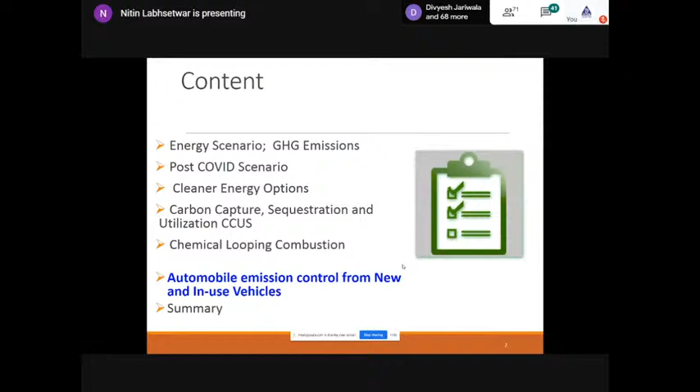So this is how I planned it, and I'm going to show a lot of slides, and of course I'm going to give you a lot of stress, because I have also seen that after my talk there will be a talk on stress management. So please don't worry. And as I mentioned, please enjoy this lecture and feel completely free to discuss.

Just 2 to 3 slides about my institute, what NEERI is all about.

NEERI is a CSIR lab. Most of you must be aware about CSIR, the largest scientific body in the country and one of the largest in the world. We have 38 labs, and NEERI deals with almost all aspects of environmental science and technology. We have dedicated departments like water technology and wastewater technology, and considering that energy has a lot of impact on environment, we have a dedicated division which I look after, the Energy and Resource Management Division. In addition to about 120 scientists, we have a very strong presence of students, who are actually our workforce and our strength.

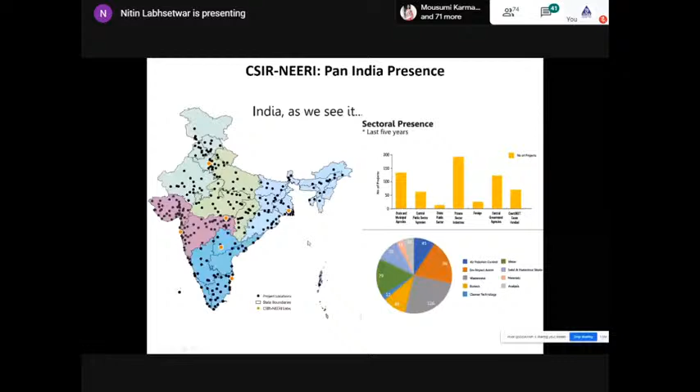We have done projects pan-India, taking advantage of 5 zonal labs of NEERI as well as other CSIR centers and labs. This is the group of the division I look after, called Energy and Resource Management Division, where I personally work actively on diesel emission control and after-exhaust treatment technology. I'm going to share some slides on this.

We are also working on another cleaner energy process, which is a competitive technology to carbon capture, and I'm going to introduce this interesting work, because there is a lot of interest from the engineering community, especially chemical engineers and mechanical engineers.

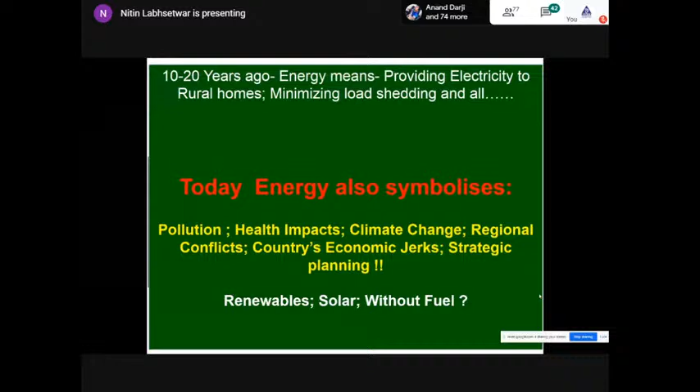And the renewables, the solar - 15 years ago any kid would tell you, for energy you need a fuel. Today if I ask, what is the fuel for, say, windmill? What is the fuel for solar? What is the fuel for maybe geothermal? Then it's becoming more complicated. So it's evolving - that's the good part. It's evolving and there have been fantastic innovations in this.

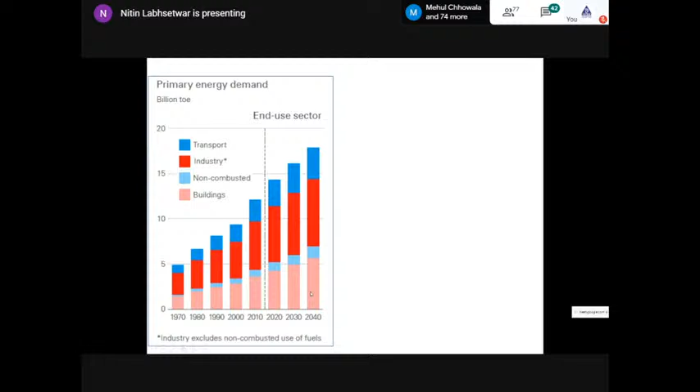Now if you see the primary energy demand, and if you ask a kid and show him this is the solar program for India and we are going with this. What is the distribution of energy demand sector-wise? One interesting thing is buildings will use a lot of energy. What do we mean by buildings? The space where we live, and air conditioning is going to capture a lot of energy. They are going to require a lot of energy in a country like India for air conditioning, and for the cold season, for heating. Then industry is a sign of growth, so industrial demand will also increase. This is an important slide for you.

With the growth of solar so impressive in India and elsewhere in the world, and renewables like bioenergy and other things coming, I think you have a very interesting talk on solar thermal. We can expect in another 10 years, if not in 10 years, 20 years, the scene will be completely changed and we'll have a very fantastic renewable option.

As per this report from BP Energy Outlook, if you see the scene at 2040, you can still see these three slots of fossil fuel providing 75% of energy, if not more. What does it mean? Why are we investing so much in renewables when we have to use this big 70, 75, 80%, unless there's some big innovation coming in the next 10 years? The only reason is you can understand from your left side graph. Despite the very impressive growth in renewables, your total energy demand or requirement is increasing so much that you will have no choice as of today but to also use fossil fuel.

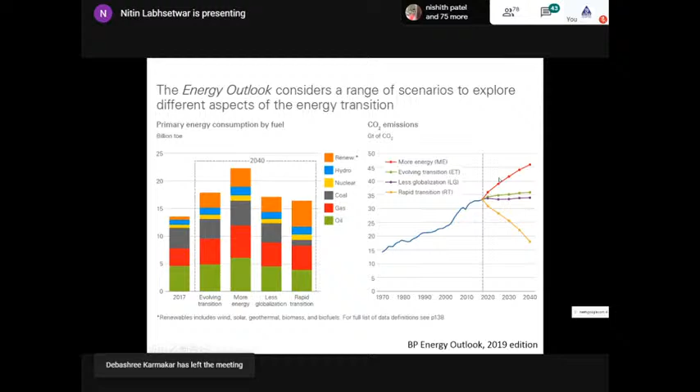This is the energy demand growth. I'm not going to spend much time because everybody knows that India, China, Korea, and a couple of Southeast Asian countries are making impressive growth. CO2 is going to shoot up because of more consumption of fossil fuel, which is primarily due to more energy requirement. We need to do something to flatten this curve of CO2 concentration.

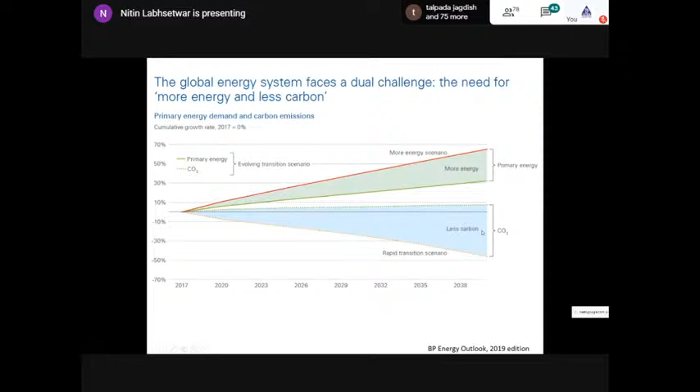In China, coal usage was down and renewables were up. But please mind, this is a percent contribution. So obviously, if overall energy demand is less, we should first manage it with renewables or solar, and if not required, why use coal? Why use oil? Every country did this.

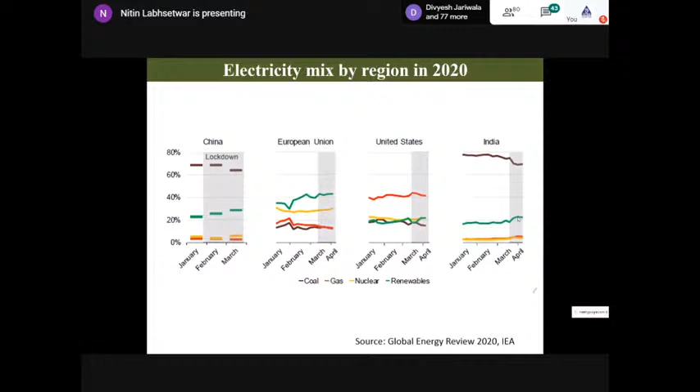Like in India also, coal was down and percent of solar used increased. We can't change the production of solar overnight, so percent contribution of solar was high.

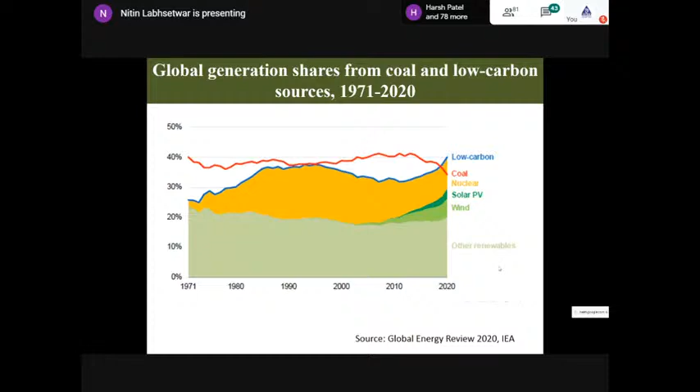This is global generation, how it was affected. Obviously the trend was the same: coal was down, solar was up during this period. This is the growth from 2018 to 2020 for solar PV. Progress was fantastic in 2018, but again it's a percent share. So we are still making very good progress in fact.

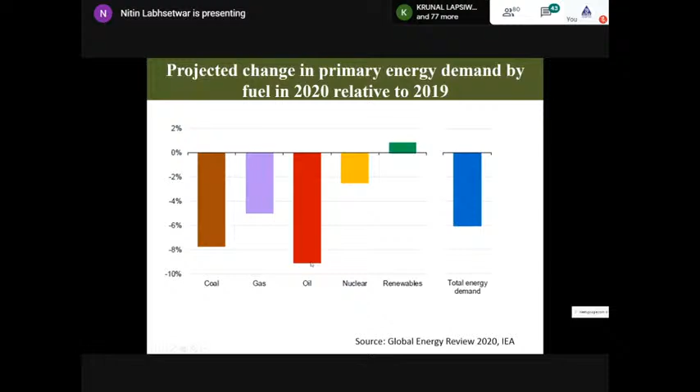Right now you can see oil demand was down close to 9%, and total energy demand was reduced by more than 6% because of the industrial slowdown.

As for CO2 emissions, sometimes there are debates. Some people say not all CO2 emissions come from anthropogenic sources, from energy or transport. That's true, there are a lot of natural sources, but you need to believe that the majority of the CO2 problem, as global warming, is because of anthropogenic sources. This COVID or Corona pandemic was a wonderful validation of those things.

These emissions, once the lockdown was relaxed, started increasing again. So this is a very good validation that anthropogenic sources also contribute, which I strongly believe. Of course, there are hundreds of ways to validate this data, but this was one validation.

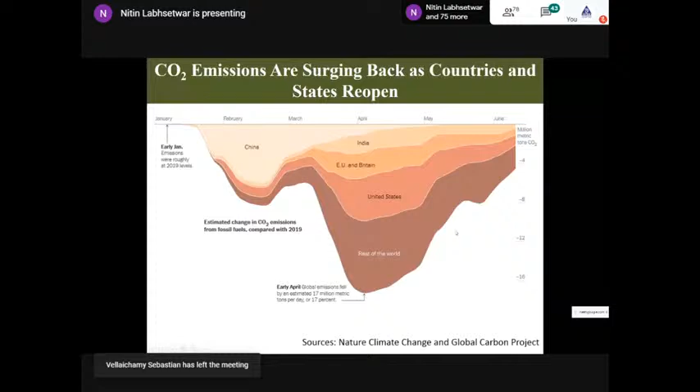So CO2 emissions are now back to normal. We haven't seen any concentration change in CO2 because it takes years. There's a paper showing carbon emissions came down by 8% due to lockdown, but all these are very temporary phenomena. Nature, one of the most reputed science magazines, also confirmed there was a temporary reduction in daily global CO2 emissions, not in concentration, because concentration is cumulative over years and decades.

So this was the background. Now I'll take you to some of the things related to cleaner energy, what we are also doing.

Mostly at NEERI, although we are working on hydrogen generation through photocatalytic water splitting, there is a group with the materials division, I was also part of that group. There are people working on hydrogen storage, and people working on waste to energy. Otherwise, most of the things we are doing is like the post-treatment of anything, or after-exhaust treatment. So my focus will be mostly on that.

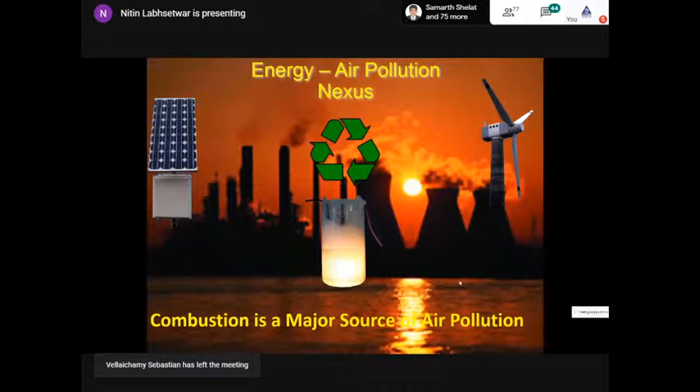This slide I'm repeating for a simple reason: we know CO2 emissions are primarily from fossil fuel or energy sources based on fossil fuel. There are two ways to address that. One is to stop or minimize the use of fossil fuel. Second, as of today, the projection says we are going to increase our fossil fuel consumption. While we should ideally reduce it, we are going to increase it. So what are the options? One option is ruled out, that we replace fossil fuel totally with renewables or sustainable, green sources. We are going to increase production of renewables, but we are not able to replace fossil fuel because of the very high demand in the future.

Second option is making energy technology cleaner or sustainable. How to do that? For example, in India we have a lot of coal, and at the end of the day it will matter about two things: techno-economic viability. In techno-economic viability, the economic part is also very important. You need to understand that what is commercially and economically viable will be a priority. Coal is plenty in India, but unfortunately coal is not so clean. So one of the best options for us will be clean coal technology, and then of course nuclear, hydro, and other renewables will be there.

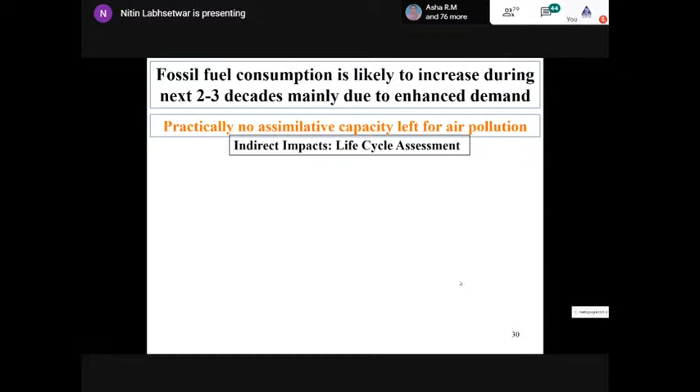Second thing, we need to also understand the indirect impact through life cycle assessment. I'm a strong believer that for practically every resource, every product, every energy option, we should do the LCA, the life cycle assessment.

Now, when it comes to environmental pollution related to energy or fuels, there are two fundamental issues. One is the global issue of CO2 emission, which has a global impact in terms of global warming and climate change. Second is a more localized issue, although these also have a global impact, like water pollution, soil pollution, and air pollution in terms of conventional pollutants like NOx and sulfur dioxide.

Let's quickly see the CO2 or GHG emissions. As I was mentioning, there is no assimilative capacity left. All of you are quite aware, right from the Kyoto Protocol to the Paris Accord, and there's something like a 2-degree change. If the change in climate or global warming is more than 2 degrees Celsius, it can have a catastrophic impact, impacting almost all sectors. We need to understand that.

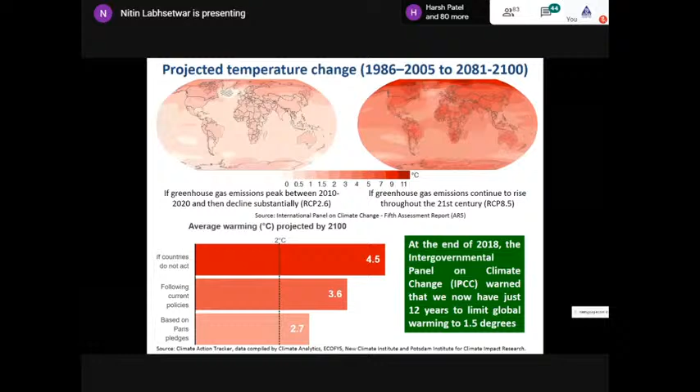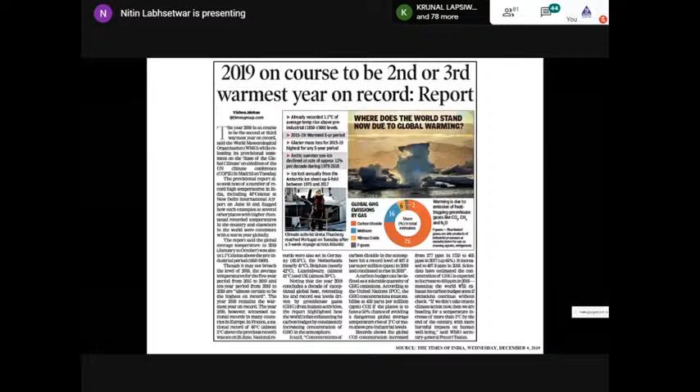There are hundreds and thousands of evidences we all see and read every day, so we are not going to go into the details. Some other opportunity I'll explain if you are interested. So half a degree means heat wave duration, rainstorm intensity, sea level rise, and biodiversity losses. We need to control it. There are evidences - I think this was clear that even 2019 was the second or third warmest year on record. So there are scientific evidences to believe this.

Now, just 4 or 5 slides I have specially introduced, which are not for you, but probably you can use them to convince your students and encourage them to understand what is direct emission and what is indirect emission. Direct emission, we all understand - we are burning coal to generate electricity which comes to our home, which we use for air conditioning, for electricity, and for everything. What are the indirect emissions for that matter?

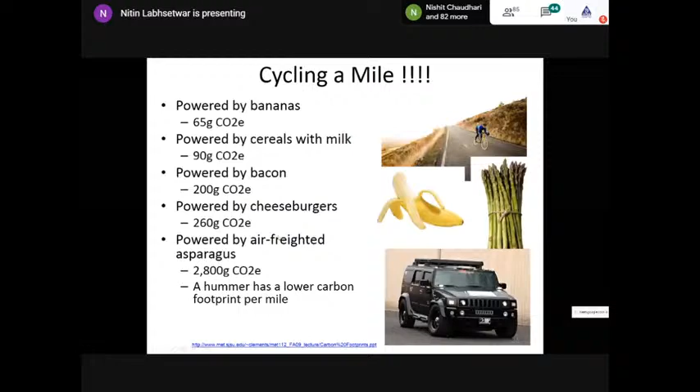This is the way we should understand the indirect emissions of carbon footprint. Carbon footprint is a very important thing. You need to sensitize your students that there is a direct emission. We understand power generation, even those from chemical engineering, chemistry, or mechanical engineering backgrounds, understand the efficiency of our power plant. So we can easily calculate how much megawatts of energy we consumed or generated, and how much coal we used. Coal is C plus O2, so we can calculate CO2.

That's very easy, but what is important is indirect emission. We all need to understand the transmission losses, the energy spent in mining of coal, transportation of coal from the mine to the power plant, the energy required while producing these machines we use in the power plant, and then the transmission lines.

So built emissions, or built footprint, is a very important concept. I often ask students what is the carbon footprint of solar energy, and they obviously respond zero. It cannot be zero because you have already invested a lot of energy to produce the solar panel, it's a high temperature process. So overall we should see what is the carbon footprint of any energy option, and for that matter any process or product. It is very important to sensitize and work out the carbon footprint.

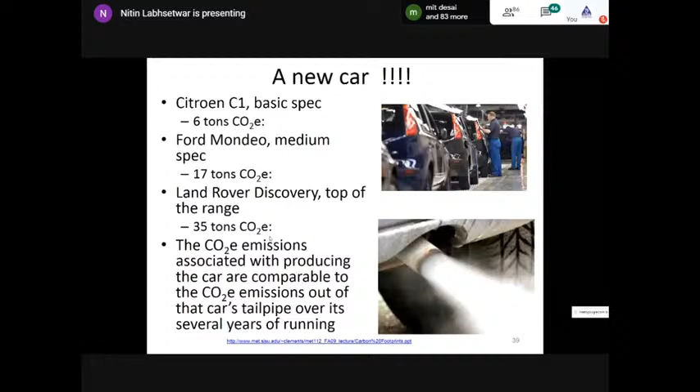From there, he uses a smaller vehicle to bring it to my apartment, where he uses my elevator or lift. So this is the indirect footprint, which is huge, and which is very much available.

Just one last example of the big advantage of this online platform: it is typically estimated that 3 tons of CO2 per scientist is emitted if you are using international conferences and flying with aircraft and using other things. These calculations you will find on the internet, very interesting. Of course, it is important to meet once in a while, but we should always think about the high footprint of traveling by aircraft and all these things, it's a very high footprint for each and everything.

So we need to look into the carbon footprint of all resources we consume, all energy options. We also need to look into the carbon footprint of final energy delivery, of final application under the actual condition of its use. What is LCA? From cradle to grave, we need to calculate everything: what is the carbon footprint, what is the material footprint, what is the energy footprint. Only then can we compare it.

Now, I will strongly suggest, many of you might be experts in LCA, but this is one thing we should promote. We should train our students, and we should also take them along.

Okay, because this is also very contextual. So don't look into any other option in isolation. It's time to subject practically everything to the life cycle assessment, even environmental processes.

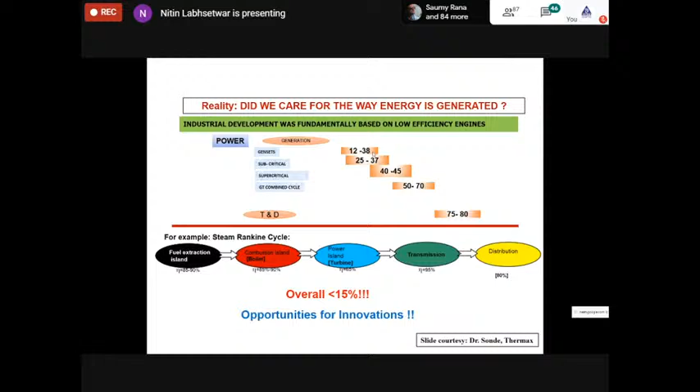There are opportunities for innovation, we should take it positively. As a mechanical engineer, if you make a difference, we all understand the theoretical limitations, the thermodynamic limitations, but we are not talking about a 30% improvement in combustion efficiency. Even if you make a 3 to 4 or 5% difference, it's very, very significant.

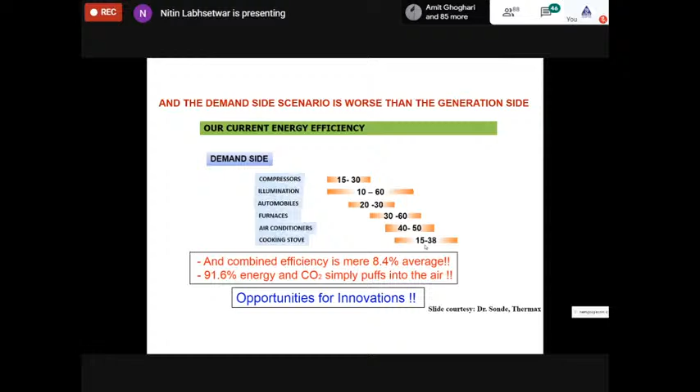Fortunately, the Bureau of Energy Efficiency in the Government of India has a very impressive, aggressive plan. Among my group at CSIR, we are working quite actively in this. There is a subgroup we call the Energy Efficiency and Management Group, and at least 7-8 CSIR labs together are taking up this program in a big way. In the next 5 years, we want a prominent presence in the area of energy audit, including industrial energy audit. So this is what I wanted to tell you.

These are all good options to clean your economy basically. Today your GDP is this much, say 10 units, but your CO2 emissions are high. We know your GDP is going to increase to 50, so your CO2 emission will also jump by 5 times. You should control it - this is a good strategy. But tell me one thing: if you are increasing your population, and increasing your GDP, you are bound to increase CO2 emissions. So these are quite debatable issues. There are things like carbon intensity - you may be able to reduce your carbon intensity, but if you're increasing your demand, population, resources and everything, in absolute terms you are going to increase more CO2.

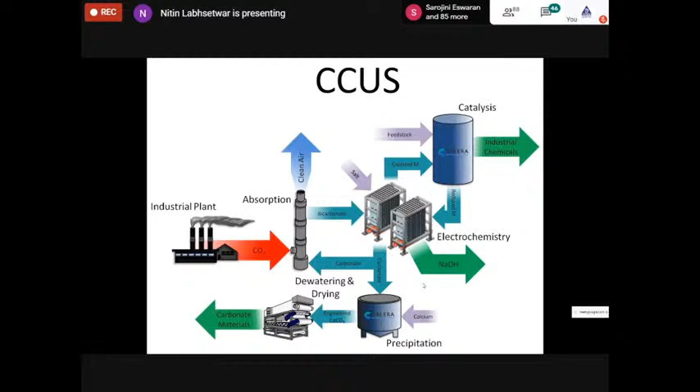So you need to pre-concentrate it. You need to capture this CO2 from 12% to say 95% - that is called carbon capture. Then U stands for utilization - you can convert this CO2 to some useful product. And sequestration is, I'll explain you about the geological sequestration.

So here comes another possibility. From the power plant, you release the CO2, we capture it, and using processes like electrolysis we convert it into carbon nanotubes - there's a big market for carbon nanotubes. But I don't think there is such a huge market today that can take care of millions of tons of CO2. So you need multiple options to convert it into multiple products.

Now come to the sequestration part. There is a good possibility that you can capture the CO2 and sequester or store it geologically, inside porous rocks. There are empty spaces from where we extract oil, and there we can probably store the CO2. So it can be pumped to extract the oil, and we can replace the oil with the CO2. So this will be trapped there.

There are some environmental consequences of this. So first we need to capture it, pre-concentrate it, and then use it. Now, if you don't want to use it and you want geological sequestration, then why do you want to pre-concentrate it? You may not - but the reason is you need to pre-concentrate it.

If you are producing at place X and you want a geological sequestration site at place Y, and the distance is 1,000 kilometers or 500 or 100 kilometers, then you need to transport CO2 from the power plant to this geosequestration site. Transportation means consumption of fuel, and consumption of fuel means you are also releasing CO2. So you might end up releasing more CO2 than you're sequestering. It is better to capture, pre-concentrate it, and then transport it, instead of transporting nitrogen along with it.

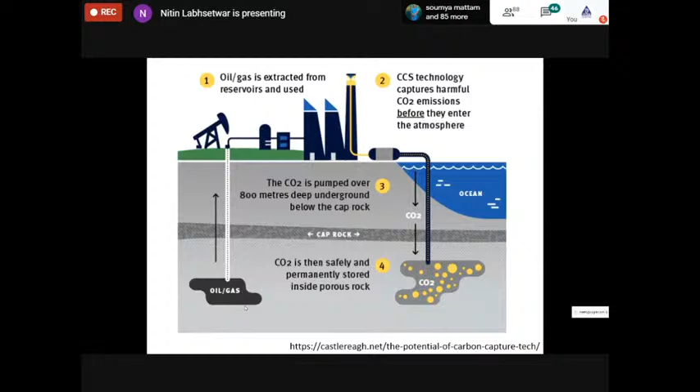So all these things become feasible when there is less energy penalty, less cost involved, and most importantly, by doing anything like this, you should not release more CO2. You should be very, very careful on that.

Now, this is a conceptual thing - you release CO2 by combustion process, by using fuel for generating energy. So the best will be if we can transform this CO2 back into fuel, say methanol or ethanol, or for gasoline in future or any fuel. But you should keep in mind, while converting this CO2 back into fuel, you should not invest too much energy, and you should use renewable energy, something like solar. Otherwise, you will end up emitting so much CO2 back. So this is ideal.

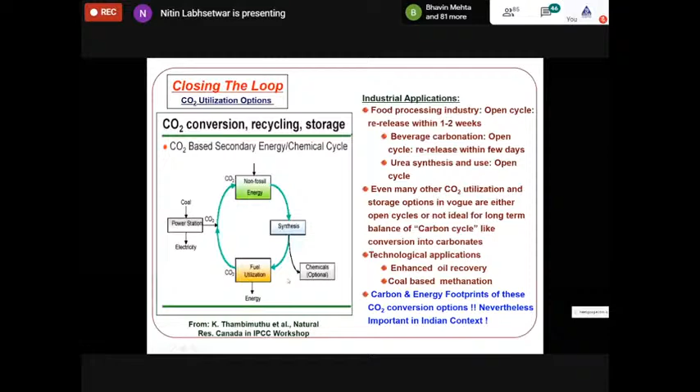Here I would like to show, in just 5 to 6 slides, what we are doing in this respect. There is an interesting process we are exploring, known as chemical looping combustion - this is a competitive technology to carbon capture. From a power plant there is an exhaust stream in which 15% of CO2 is available. We need to make some absorption or some process to concentrate it from 15% to 95%, and we need to take off the nitrogen available. Now, I'll give you one reaction which many of you might be familiar with as well.

In a combustion process, suppose you are using coal or methane. Instead of air, if we use pure oxygen, what will be the reaction? Coal is C, oxygen is O2, C plus O2 gives CO2. So if I am burning coal in pure oxygen, I will get pure CO2, not diluted CO2.

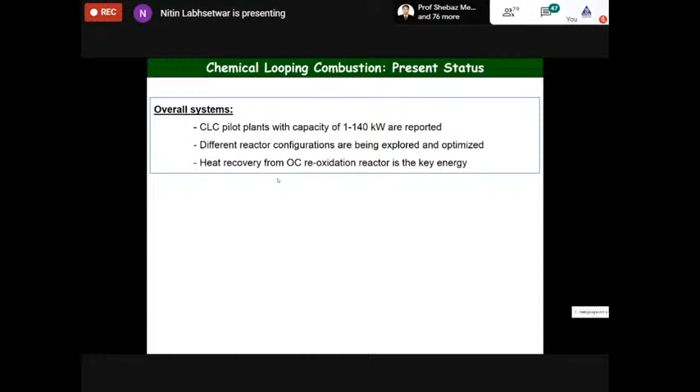There are some pilot plants, one at the Technical University of Vienna which is one of the best. The key to this development is the oxygen carrier, nickel oxide or copper oxide. Copper oxide is also very good, but unfortunately the reaction is feasible at about 800-850 degrees Celsius, and at that temperature these metals become soft. Since we're talking about fluidized beds, once the metal particles become soft they form a lump and cannot be used.

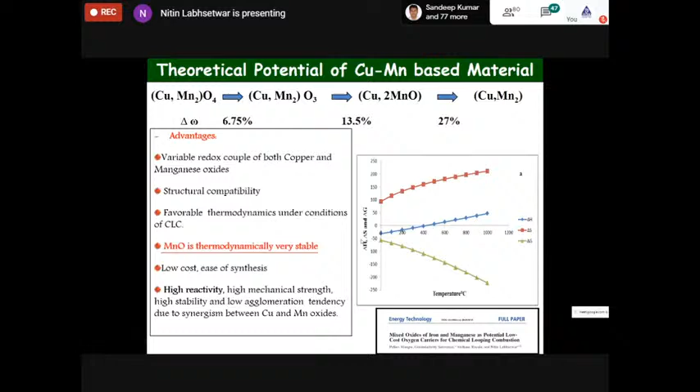So in our group, these are some standard metal oxide couples used for chemical looping combustion, and this is the theoretical potential we calculate for each compound. For the first time, our group and a Swedish group tried together using a combined or mixed oxide instead of a single oxide. We tried a copper-manganese based oxide, and calculated the theoretical value of oxygen for this mixed oxide, then synthesized the material.

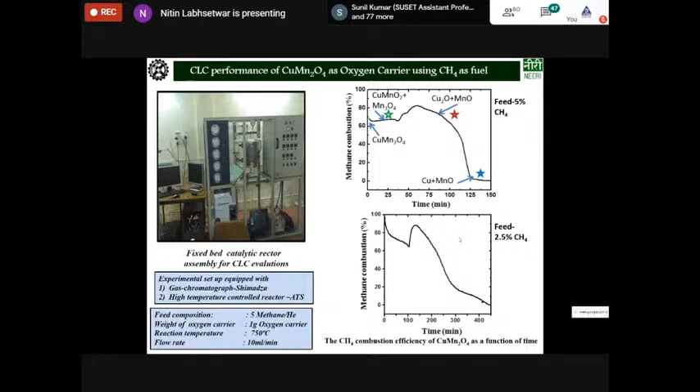We use it in our laboratory evaluation setup, a very useful fixed bed reactor where we can use a mass flow controller and prepare any kind of exhaust gas, whether from a vehicle or a power plant. We use this reactor to run the reaction and find out how much oxygen it provides. This should ideally be tested for hundreds of cycles, but in the laboratory we cannot do that, so we test at least 10 cycles to establish that this is a good or potential material.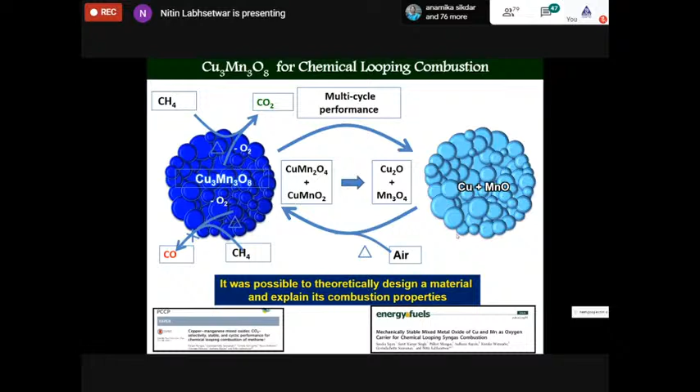So we have done this experiment, and now we are looking for collaboration with mechanical or chemical engineering groups who are good at modeling as well as bench scale studies on fluidized beds, because we need to produce a couple of kilograms and work on the fluidized bed to see if this material is good.

So now I am more or less completing the first part of my talk, related to energy, before we switch over to automobiles. I wanted these two kept separate, otherwise there would be a lot of confusion. As regards the energy related part, we will conclude here, and then switch to the automobile part, which I want you all to look at quite independently. Being mechanical engineers, you will probably enjoy that part more.

So as far as cleaner energy issues are concerned, to repeat, the energy demand is rapidly increasing, and because of that rapidly increasing demand, our renewable development or growth, the production of renewable energy, is not able to match that demand, because it takes time, investment, innovation, R&D, and installation.

Because of that, we are likely to use fossil or carbon-based fuels for decades to come, for sure, until 2040 and 2050. This means several energy options and improved energy efficiency will be very important. Promoting a single option can be risky. Whenever somebody comes and gives a talk on hydrogen, methanol or solar, naturally they need to highlight what is good about that option.

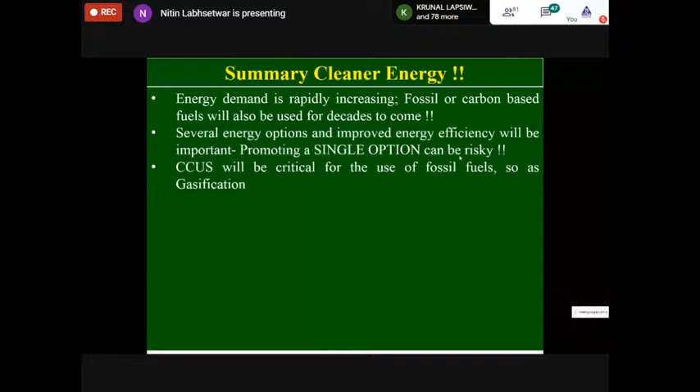Life cycle assessment is very important, especially in the Indian context. We need to work out how it is impacting when we are using our own coal in a usual way versus a clean way, and how much we need to invest if we are importing some technology. We need to really do the life cycle assessment, and there are wonderful studies being done on the LCA of different energy options. Efficiency will be one of the keys for sustainable development.

I'm very convinced we cannot afford to waste any resource. You all must be aware that if you throw away 1 cup of coffee, it feels like we have thrown maybe 100 ml of water. But the water footprint of 1 cup of coffee is estimated at 30 to 100 liters. So that much water you are wasting, because we just think the volume of coffee is 100 ml, so how come it will be in liters?

You should calculate that when the tea or coffee plants are growing, we need a lot of water to feed them, and then there is processing of coffee and everything. So there's a very huge carbon footprint and water footprint for every resource we use. We must be very sensitive to that.

Then we should have policy issues, because we need a holistic approach. Nowadays we are talking about decentralized energy systems, which is a good idea, because the central grid or mega grid is very good, but there are transmission losses. Now there is a concept of energy island, meaning you have a town of say 10,000 or 20,000 people.

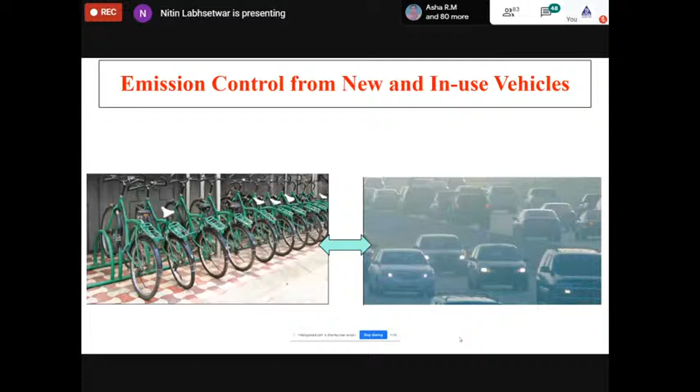I'll take this opportunity because I'm actively working on automobile emission control, specifically after-exhaust treatment. I don't work on the engine itself; I collaborate strongly with other people. In automobile research, the situation is quite similar.

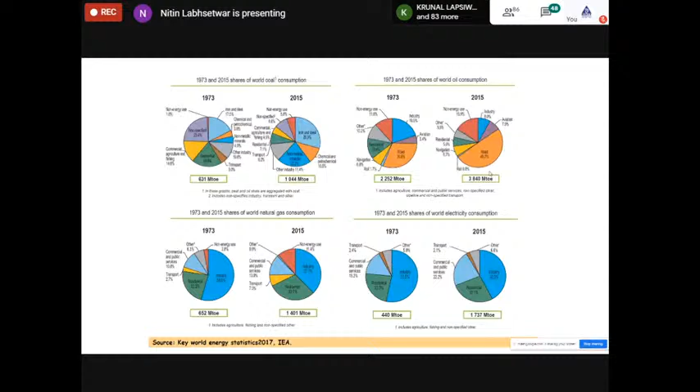These are statistics related to the share of oil consumption and transportation, because a significant part of oil consumption is for transportation needs. So the transportation share to energy consumption, especially fossil fuel based energy consumption, is very high. At the same time, transport is a major source of PM 2.5, particulate matter emissions, NOx emissions, non-methane VOCs, and CO emissions.

I'm not going to go into details on these distributions because you can find this information at the click of a mouse from sources like CPCB or international sources. The energy statistics I've shown are mostly from BP Energy Outlook or IEA, International Energy Agency. This data is from CPCB, which has very good databases.

Many of you might be aware, but whenever you talk to students or policymakers, you know Euro 6 is one of the cleanest engines in the world. The automobile industry has made tremendous progress in the last 20 years - you got a fantastically clean engine, a fantastic fuel. But still automobile emissions are increasing. There has to be some reason. One very clear reason is the number of automobiles is increasing.

We need to understand the fundamentals of any intervention to control automobile emissions. One is we need to reduce vehicle kilometers per passenger. Why do you need to travel so much? If you go to Bombay, the whole city is traveling in the morning and back again in the evening. What is the need? That shows you are poor at town planning - sometimes I call it horrible town planning, where everybody has to move from one place to another.

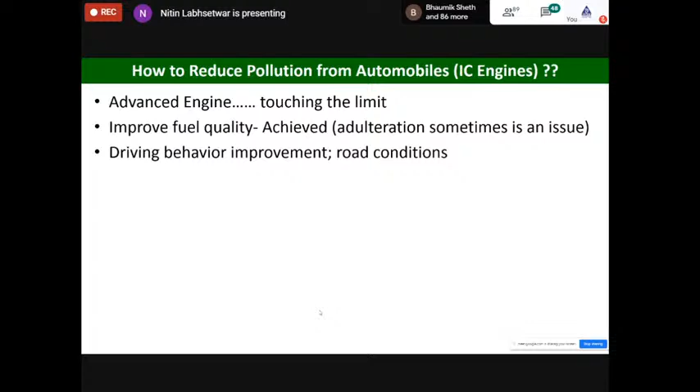Driving behavior improvement and road conditions contributes a lot. Road dust, I'm sure you know, is one of the major contributors of particulate emission - it's not only diesel emission, road dust also, because of poor road conditions. And driving behavior - every Indian has his own driving cycle, the way they drive. Then comes traffic congestion, also one of the very big issues.

Then improve tailpipe emission by implementing standards step by step and using after-exhaust treatment. India has been doing this in a very impressive way, starting in the early 90s when the catalytic converter was introduced. Now we are at Euro 6. Compliments to the automobile industry and all those involved.

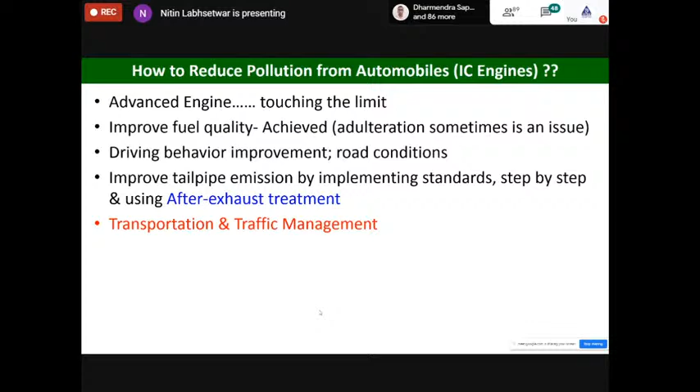Transportation and traffic management - very poor. Average speed in Bangalore and Delhi, I think, is less than 10 kilometers per hour. Obviously it will be a more polluting vehicle, and your vehicles are not designed to run at that speed - 10 kilometers or less per hour. That's your average speed. Reduce emission exposure.

This helps you quickly understand why people debate the e-vehicle versus the IC engine vehicle. There's an argument that if you are producing electricity from coal and providing it to an e-vehicle, what is the advantage? One advantage in this case - since you are producing electricity from coal, the CO2 emissions will still be there.

You are still using fossil fuel, but the difference is, if you are producing electricity in one power plant, say in Delhi, and supplying that electricity to 40 lakh vehicles, and in the power plant you have 3 or 4 stacks or chimneys, it is easy to control emissions from those 4 stacks rather than 40 lakh vehicles. And emissions from vehicles will be in your exposure zone, released very close to your office, very close to your house, so you have more exposure. That's the advantage of this.

Inspection or maintenance, I am intentionally highlighting these because they are weak areas, especially in India. Inspection and maintenance of vehicles needs to be taken up in a very strict way, and control of emission from old or in-use vehicles is also a big job to do. So these are the major efforts for cleaner passenger and heavy-duty vehicles in India.

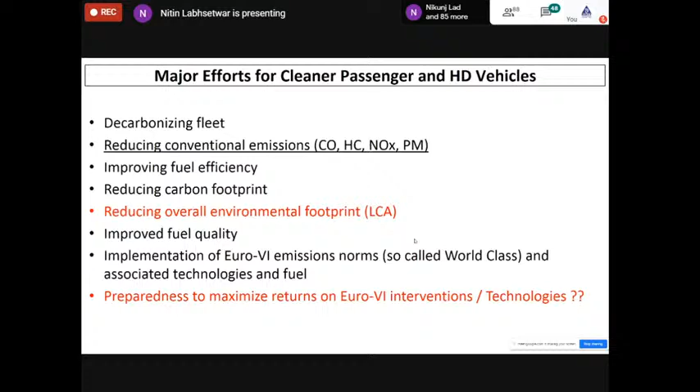Decarbonizing fleet, now we have CAFE regulations and everything. Improved fuel efficiency, I already told you. Reducing overall environmental footprint is an issue, but it is also being taken up. Now the industry is very sensitive about carbon footprint and overall environmental footprint, but I think end of pipe or disposal of vehicle is still a problem in India.

All right, we'll quickly see what kind of technologies are being used for diesel emission control, because diesel has been in the limelight as the most polluting vehicle, and you must have heard that many major automobile companies have stopped producing or reduced production of diesel vehicles, switching to natural gas and gasoline. So diesel, the major problem with diesel vehicles is particulate matter, or smoke. Why is the smoke black, and why are emissions from petrol vehicles not so black?

Because there are these black particles. If you see the particles coming out of the engine manifold and traveling in the exhaust system, there are two phenomena that happen when they travel from manifold to tailpipe, one good and one bad. What is good? These are very tiny particles when released from the engine, so they start colliding with each other and get agglomerated. Bigger the size, less harmful, because it doesn't penetrate your lungs, your respiratory or nasal system will trap it. That is the advantage.

What is bad? Unfortunately, there will be some gases or hydrocarbons which get colder and start condensing over this particulate matter, which provides toxicity to the particulate matter. So they are carcinogenic in nature. This is how it looks in the SEM.

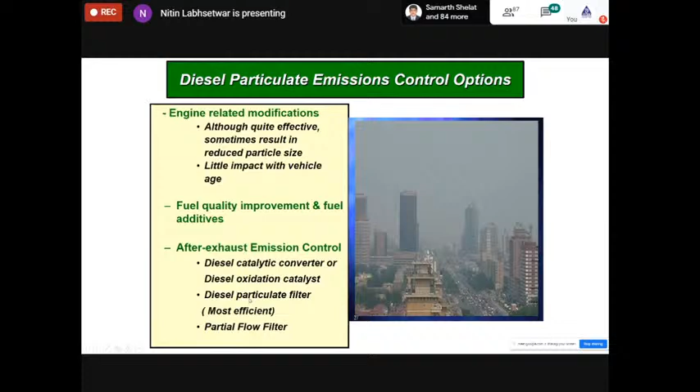There are three options. In diesel, another pollutant is NOx, so you need NOx reduction. For that there is a technology called selective catalytic reduction, SCR. It's a bit of chemistry, so I'm skipping this and focusing more on particulate matter control, which is a bigger issue in fact, the DOC and DPF, we'll look into these things in detail.

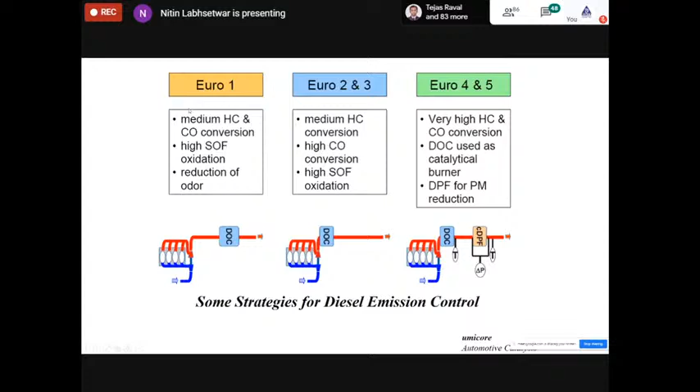These are the different after-exhaust treatment options generally required. It depends on the strategy of the automobile manufacturer, how they control engine-out emission and after-exhaust. It's fairly complex nowadays and a fairly good amount of expertise is available now. This is for Euro 2, Euro 3, Euro 4 and Euro 5, and we'll see for Euro 6. The first technology is diesel oxidation catalyst technology, DOC.

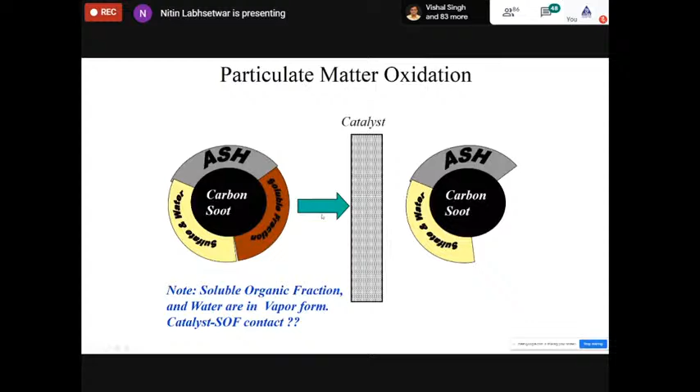This is the composition of your soot particle. Here are hydrocarbons, here is the ash, this is the carbon core. Unfortunately, with DOC, the catalyst cannot burn anything other than this hydrocarbon, so the particle loses only a part of this. This is like a catalytic converter, you have a honeycomb, the exhaust is coming like this, the particles are coming like this, and the catalyst is oxidizing only the SOF, soluble organic fraction we call it, and you still have a particle. So the efficiency of this device is low, about 20% or at most 30%.

The second device is diesel particulate filter. The diesel particulate filter is based on the concept that if you have a particle and you need to separate it, what do you need?

You need a filter. It's like preparing a cup of tea - you can keep it and try to decant it, but still the filtration efficiency will not be good. So what we do is take a strainer, a filter, and quickly strain it, and strain the tea.

So if you have to separate the particles, which are either from the power plant or from the vehicle, especially from the vehicle, the most efficient device is a filter. It is called the diesel particulate filter, which is used for Euro 6.

So now it is again the honeycomb structure, but the alternate channels are plugged. So the exhaust can come in and enter but cannot go out. It has to travel through these walls of the honeycomb, which are like a ceramic membrane. So these will trap or filter the particles and the clean exhaust comes out.

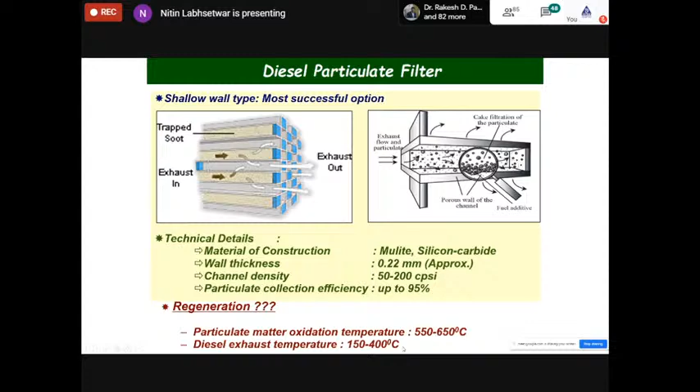So cleaning of this soot is a major challenge. Cleaning, or management of cleaning, or regeneration of this DPF is a major challenge because this soot burns at about 600 degrees Celsius, while your exhaust temperature, being a lean burn engine, is quite low - about 150 to 400 degrees Celsius at best. So you need to find some solutions. DPF regeneration is a real challenge.

So there are two ways. Active regeneration means you have to provide some heat. Either you can have an electrical heater, which will be very expensive because the energy penalty cost will be very, very high, or you can have a post-injection system where you introduce fuel here, and the fuel will be burned just before the DPF once you have enough soot accumulated and your back pressure is high. That is an indication you need to burn it.

So there is a complex system for active regeneration. You can introduce fuel, burn it, and it will provide a sudden rise in temperature, and the soot will be burned and the filter cleaned. The challenge is it has to be controlled, because if you shoot the temperature too much it might cause problems, since the particulate matter accumulated in the filter will also generate heat. So it has to be done carefully.

Now the second option, known as passive regeneration, where a catalyst is used. So you've seen the DOC like this - you have the clear channels, clear honeycomb channels. It's like a catalytic converter.

What the DOC does - you have a lot of NOx or NO in the diesel exhaust. This NO gets oxidized into NO2, and this NO2 reaches the DPF, and the reactivity of NO2 is very, very high for the soot. So even at 250-300 degrees Celsius, this NO2 can react with the soot trapped or accumulated in the filter and clean it. This is a very common method - I've taken it from the Johnson Matthey method. This is called a continuously regenerating trap, and there have been a lot of advancements in this.

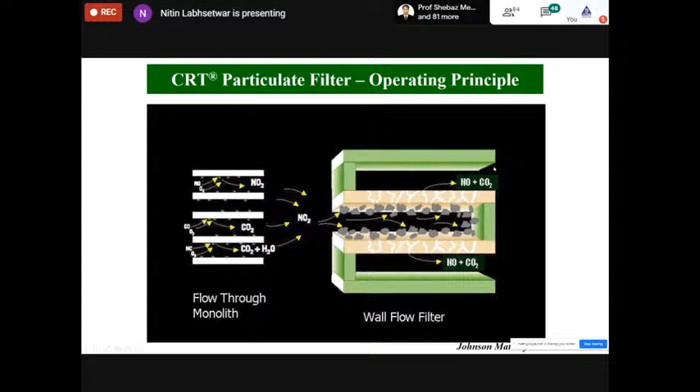The issue with DPF is that the entire amount of exhaust, which is a very high volume, like 100-150 liters per second, needs to be filtered, needs to flow through this DPF. So naturally there will be a pressure drop. Although the efficiency of DPF is very high, there will be pressure drop issues - so this is a trade-off. In DOC, particulate collection efficiency is poor, but pressure drop is almost negligible. In DPF, it is 95%, but the pressure drop is high. So there is a third technology called the partial flow filter, which is more or less in between DPF and DOC, with a different mechanism of particle collection.

We try to make a tortuous path so that it loses its momentum and gets accumulated. This is also not very commonly used, while it gives about 40 to 50% efficiency. This is one device we would like to try for old vehicles, in fact.

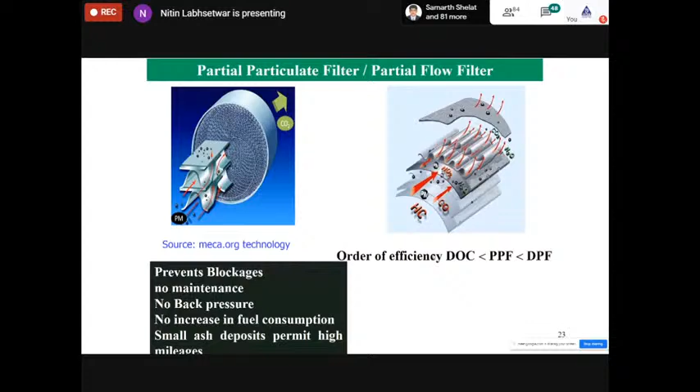The regeneration process is almost the same. There are three very common technologies: DOC, diesel oxidation catalyst; DPF, diesel particulate filter, which has very high efficiency; and in between, a partial flow filter. These are commercial technologies available.

So what are the R&D challenges and opportunities? Because I am a chemist and material scientist, I look after the catalyst part, but we strongly collaborate, especially with Professor Avinash Agarwal from IIT Kanpur, our own institutions like IIP Dehradun, and sometimes some foreign universities. So just let me take 5 minutes and take you to the chemistry world.

I told you the reaction: NO2 plus C is NO plus CO2. So you need to basically provide NO2 for the catalyst.

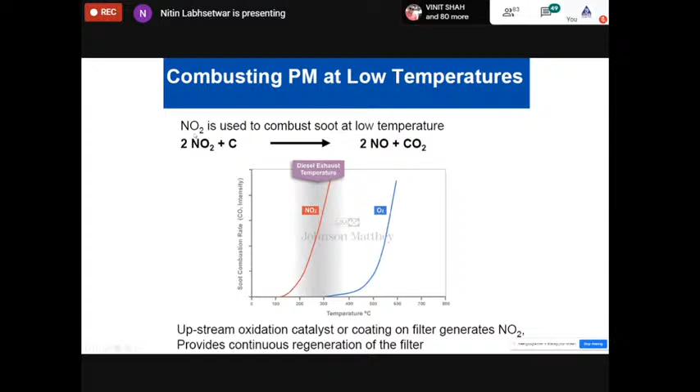Most of the catalysts use a noble metal based catalyst. So the driving force for R&D is noble metal versus non-noble metal based catalyst. Worldwide there are limited resources of noble metal catalysts, which are platinum, palladium, rhodium. They are very costly. If you can minimize the amount of these, or replace platinum with other metals which are easily available in India, which we call transition metals, your job is done. So there's a great amount of research going on worldwide.

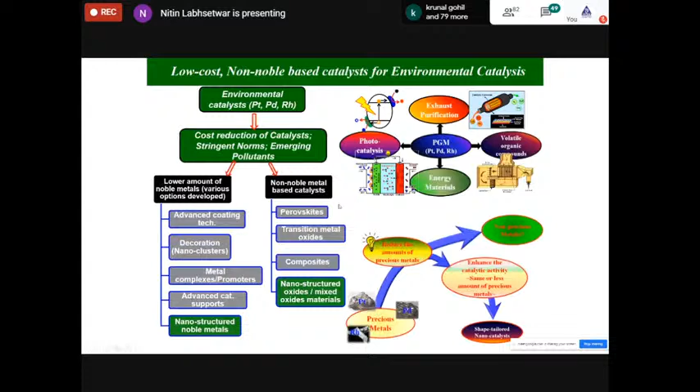One approach is to lower the amount of noble metal, or replace it with non-noble metals. So we work on low-cost catalysts. These are some chemistry terms like perovskite and mixed oxide based catalysts, which do not use, or use only a small amount of noble metal. These are the catalyst compositions.

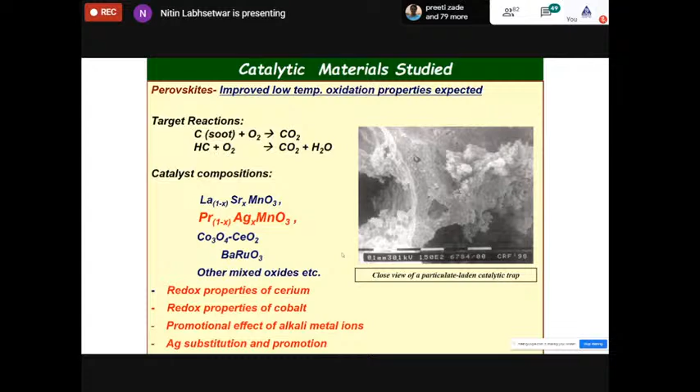I'm not going to go into the details of the chemistry, where we look for redox properties. Of course, we also look for thermal stability and other parameters. Then we go for the three stages of catalyst evaluation.

First is a lab reactor, where we have a fixed bed, small laboratory reactor, or we can use a thermogravimetric machine to evaluate it. Second is a bench scale facility using a small diesel engine, and third is the engine dynamometer test.

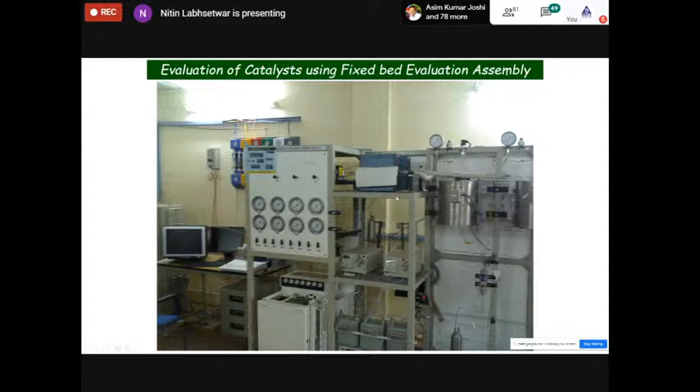The second level is bench scale evaluation, we call it. We prepare about 100 cc or 200 cc catalyst coated support. This facility I use at Kyushu University, Japan, where I have had a lot of opportunity as a visiting professor. We keep a diesel engine here, and part of the diesel exhaust is passed through this. Again, we can measure the CO2 and other emissions.

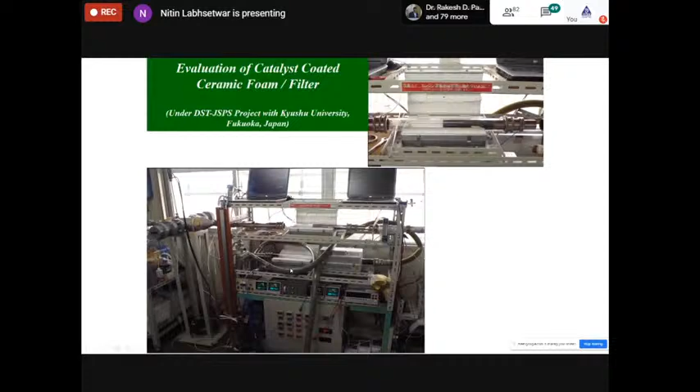Sometimes we need to also check for other emissions because of what we call partial oxidation. Not necessarily is it producing CO2 - sometimes it may lead to some other product.

Then for evaluation of the prototype, we prepare a full-scale prototype using this commercially available ceramic honeycomb. There are very simple methods of coating it. This is how it looks like.

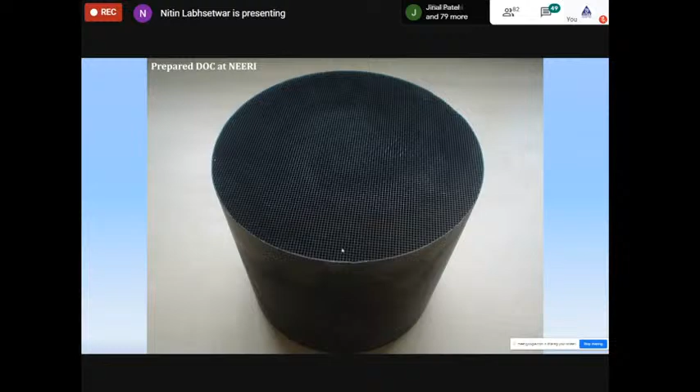This is a DOC we prepared with one IIT Nagpur student, Pravesh, and I think my student Rohini, who did some work in our lab. Then we need to do the canning of this, which can be easily done, and we can put some sensors for pressure, taking out the gas, and also a temperature sensor.

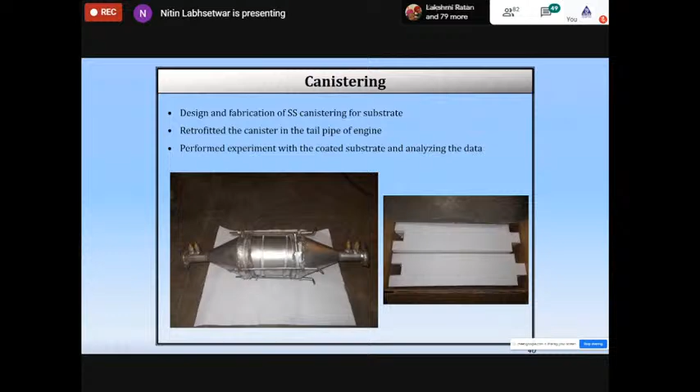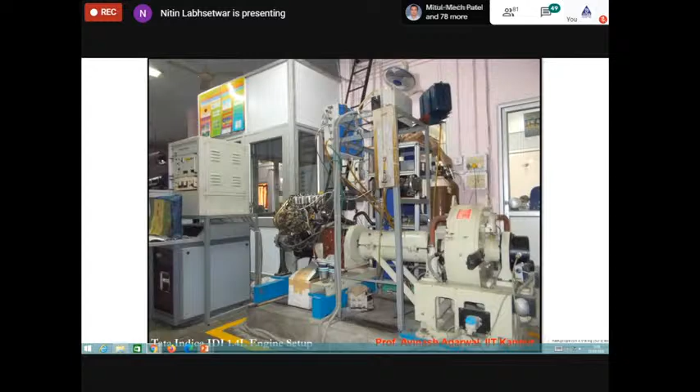This is the setup from Professor Avinash Agarwal's IIT Kanpur lab, one of the most impressive facilities I found in India because there are so many dynamometers he alone maintained in his lab, and it's always available for all the good researchers who want to do some work. So thanks to him that we were able to analyze and evaluate our prototypes at the full scale.

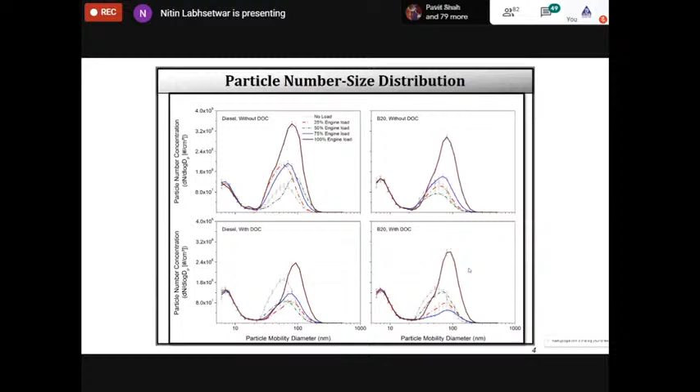But even after prototype evaluations, it's a long way to go because we need to check thermal and long-term stability. Then you need to work with the industry. They have their own set of tests, and then they have to also meet the Euro 6 or whatever norms. In Euro 6, it is getting very complex, and that's why I'm saying although after exhaust you can clean the exhaust, it's not a good idea to unnecessarily use the vehicles and emit the exhaust and then try to treat it.

It's not done. So this is fuel injection, then it will go to DOC where you will burn the fuel, and it will go to the DPF for active regeneration or passive regeneration. Then you will have selective catalytic reduction of NOx. For that you need to introduce ammonia, and somebody will explain you that, I'm sure. And then you need to also take care that there should not be excess ammonia, so this is the ammonia slip catalyst.

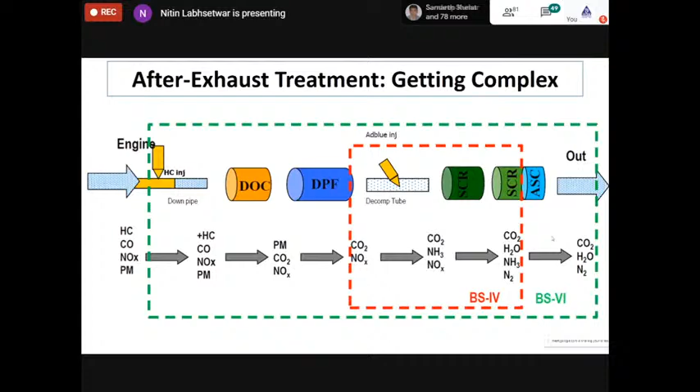So it is a fairly complex and expensive system, and that's why many automobile majors are now preferring to lower down the production of diesel. This is very impressive, the Euro 6 - it's fantastic, and it was done in a planned way. We should compliment both the government and automobile industry and all those involved that they were able to meet this deadline, although they had a tough time according to me. So all this analysis was done before, 5 years ago, 6 years ago.

But there is a 'but' here. This I have taken from Tim Johnson, whom I know as one of the very celebrated scientists from Corning, who worked a lot in auto exhaust. He explained that Euro 6 is fine because the automobile industry and emission control industry have taken care of it. But what about maintenance of the vehicle? What about how do you take care of these devices? Although there will be a foolproof system with OBD systems and all these things...

But for some reason, if there is fuel adulteration, or damage in the device, or the vehicle is not maintained properly, you can imagine that the Bharat 6 selective catalytic reduction system gets disabled. Sometimes people just remove the system. The NOx emission can go up by 10 to 15 times. And for light duty vehicles, if you remove the catalyst or catalytic converter device, the emission could be as high as 40 times.

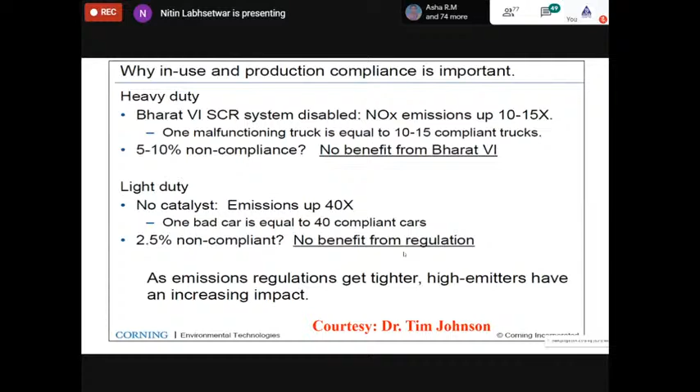Okay, so for new vehicles, it is very standardized because the automobile industry has to meet it. They have to go for the type approval test. It is done very nicely. They have to go for COP, conformity of production, test.

But for in-use vehicles, we have a pretty poor system in India, I would say. Vehicle manufacturer's responsibility is straightforward, they are always very sincere, in fact for type approval or COP.

Vehicle users' responsibility is to comply with the idle emission norm, PUC, which is in a bad shape so far; to comply with the fuel requirement, that is okay, done; and to comply with the I&M program, if any. We do not have a proper inspection and maintenance or certification program. Now it should be done very strictly in a systematic way, because all the developed world has got a very good I&M program.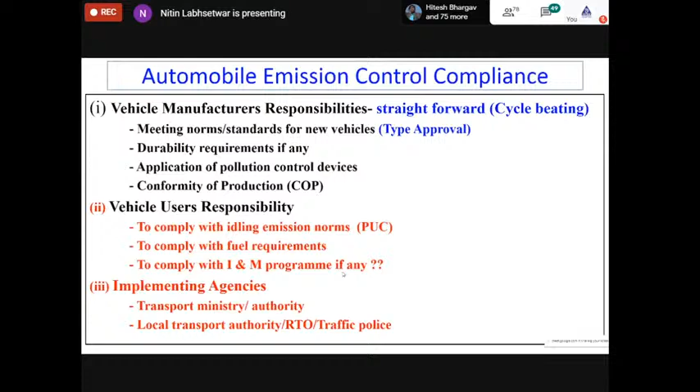Sometimes their annual certification costs so much that it is more expensive than buying a second-hand car. But in the second-hand car, you will not get that certificate. So now there is a wonderful development, but it should happen fast. There are test centers being set up, not like PUC centers, but for this I&M program.

I just skipped those slides for want of time. Okay, the last 5 minutes I'll spend on retrofitment, which is very important. Why is it required? In India the vehicle life is very high, and I have already explained there is a substantial amount of carbon footprint and energy footprint during the production of the car. So it's not a good idea to throw the car after 5 years, as is happening in the developed world. So if possible, if your engine technology permits, you should try to maintain the car and possibly try to retrofit it in terms of emissions and use it.

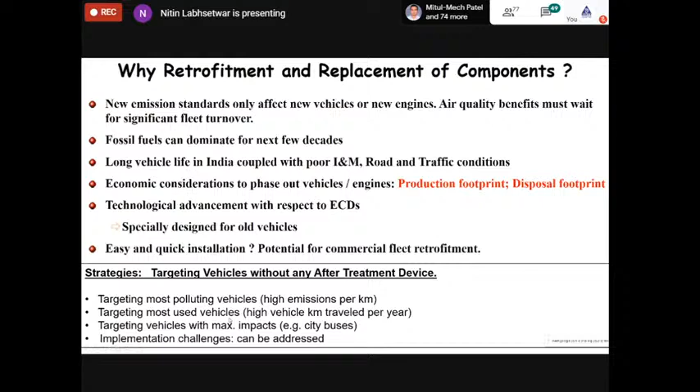For that, you should target the most polluting vehicles which are giving high emissions. Target the most used vehicles like taxis, heavy duty trucks which run day and night. Also target vehicles with maximum impact, for example city buses and intercity buses. An intercity bus is out of the city for a while, but the city bus is inside the city all the time. So if your city bus is really dirty or emitting, it will have more impact.

Then there are implementation challenges. So this is your vehicle population. As of now, probably you have got about 25 crore vehicles in India, more than that, about 26 crore vehicles. Out of those, you can count how many are Euro 6 vehicles, because it was just introduced this year from April 1st. And you can also count how many are Euro 4 vehicles.

So this is to make you realize that the majority of your vehicle population is old. Although you have a very clean vehicle population now, its contribution to the overall vehicle population is very small. So these old vehicles will keep on emitting high emissions. We cannot throw them away for economic reasons, and also because there is some embedded energy we already invested in that.

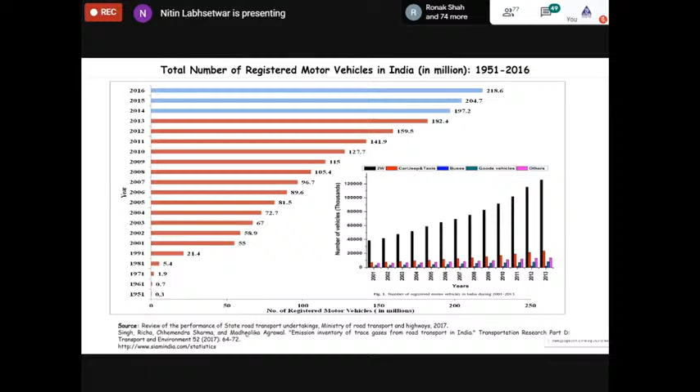So is there any possibility we can retrofit these vehicles with devices like catalytic converters, diesel particulate filters, and make them clean for the next 5 years? And then, of course, we need to dispose of them eventually. So that is called retrofitment.

So we did a project 10 years back. That time it was done with PMT, Pune Municipal Transport Company. We used buses which were Euro 1 mostly, in fact Euro 0 and Euro 1 buses, and those were obviously pretty dirty buses because at that time the emission norms were not very good, and those were emitting very high.

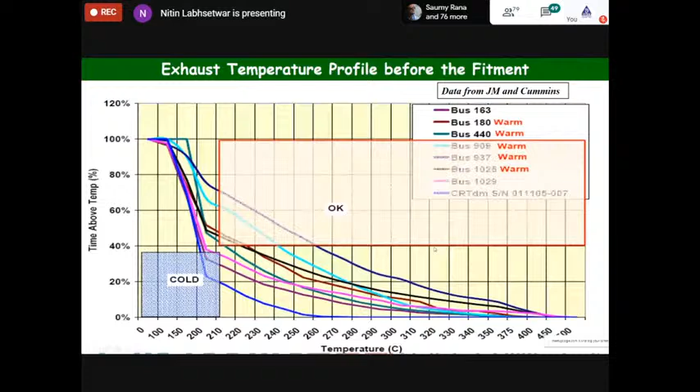So we checked the exhaust temperature. The problem with these city buses is they ply throughout the day inside the city, naturally, so the exhaust temperature is very low. We checked this with a project we did with Johnson Matthey and Cummins. They checked the exhaust temperature, which was not suitable for these devices. Then we did some kind of insulation and other things, and tried to find out which buses are okay to use it with.

And then we retrofitted with the DOC and partial flow filter. These are the devices which check the back pressure, and then it can trigger either bypassing the exhaust or regenerating the exhaust.

It's not easy to use in city buses because passengers are there, so we need to take all the care. It was for the first time we used this around 2009, probably. First time we used onboard testing of a vehicle on the actual road. We simulated the passenger load by putting sand bags, and we checked the PM emissions before and after the device.

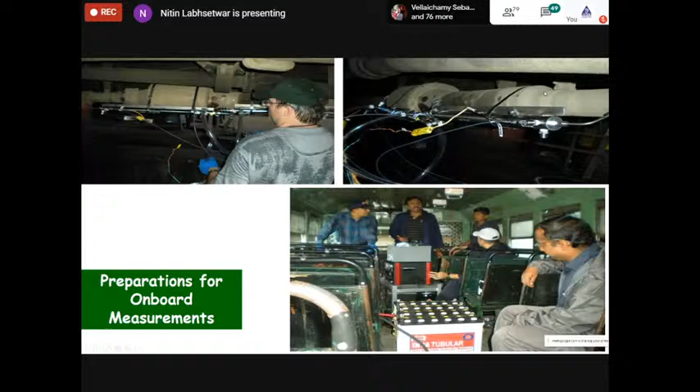But the soot load was so high that these devices used to get clogged very easily, and we used to open it, physically clean it, and in fact sometimes we found the devices were damaged, because there will be soot accumulation, and when the soot burns, the localized temperature will be very high, more than 1000 degrees Celsius.

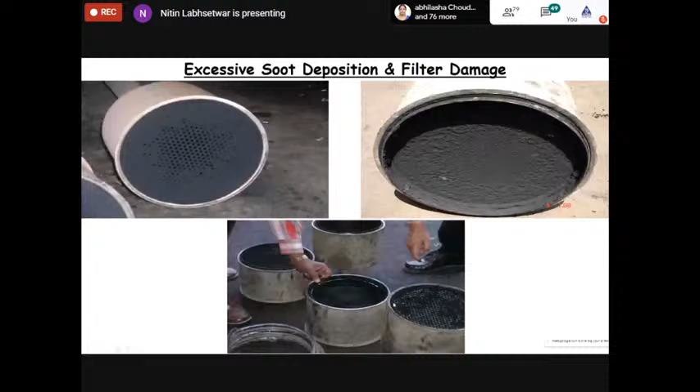So we concluded that probably the Euro 1 buses were not suitable for retrofitment because those were mechanical engines, obviously up to Euro 2, Euro 3 probably. Very high soot was there, it is not good. But we recommended that in future, retrofitment will be a good idea for Euro 3 and Euro 4, after certain aging, they could be good candidates for retrofitment. It's pretty complex in nature.

The automobile industry-related compliance, the type approval and COP, are very nicely done. But in use by the vehicle owner, we need faster implementation of I&C centers. We need to possibly involve all these vehicle manufacturers because their service stations can serve as very good centers. In fact, PUC needs revamping completely.

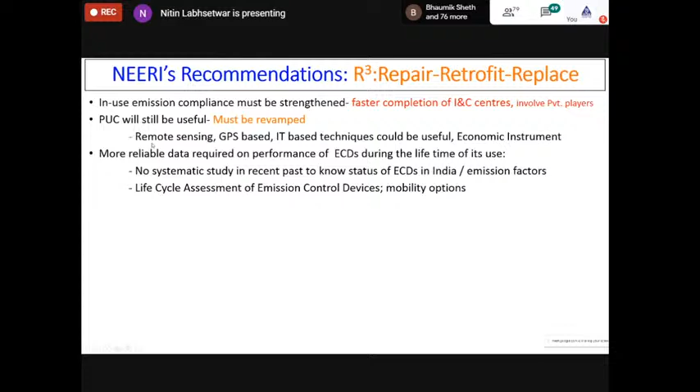There are new technologies like remote sensing, GPS-based sensing, OBD sensing. We should use that. More reliable data is required for emission control devices.

We should repair, we should retrofit in the proper vehicle, and only when there is no possibility, then we should replace. But as I mentioned, we need to look into the broader issues where we need to reduce the requirement of travel first of all, that is very important. So we need to work on emission control from the in-use vehicle, mainly we need to really work on that.

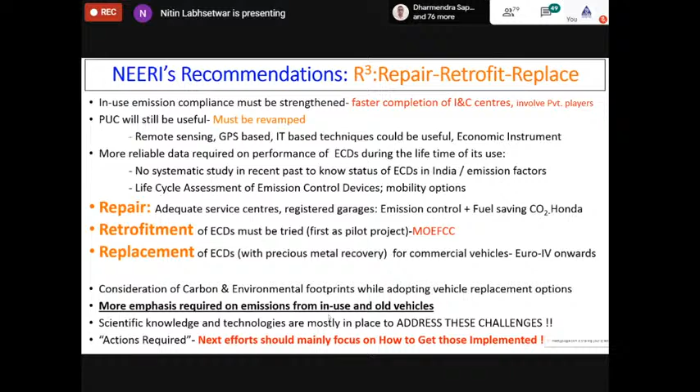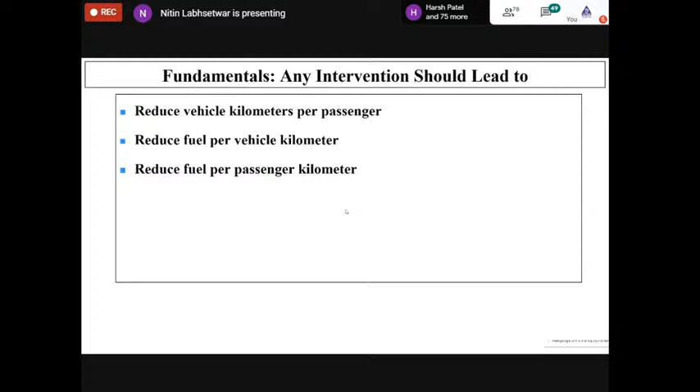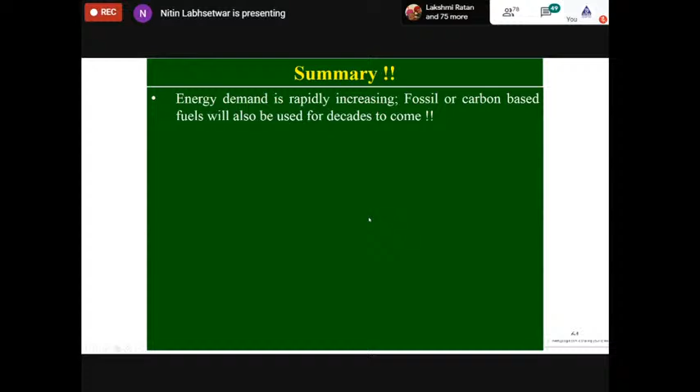So this is the summary. I'm just closing now, repeating: energy demand is rapidly increasing. Fossil fuel will be used for decades to come. Several energy options will be required, so is improved energy efficiency. Carbon capture will be important, CCUS. Life cycle assessment is very important in the Indian context. Efficiency will be one of the key things, it's my buzzword actually. We need to do the policy issues and a holistic approach, and there are good R&D opportunities for all of us.

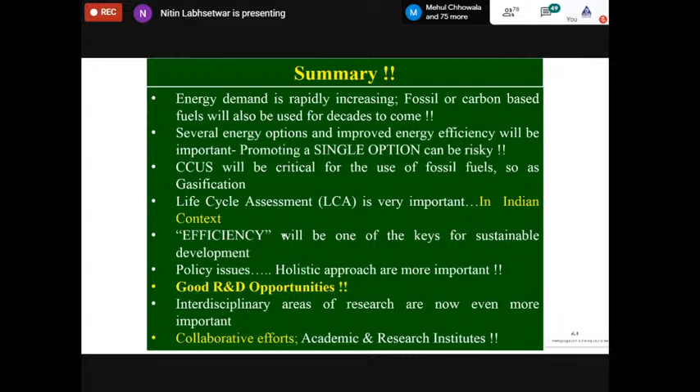That means we need to really control our greed and improve our resource efficiency. We should never waste anything; only then would we be able to achieve what we want.